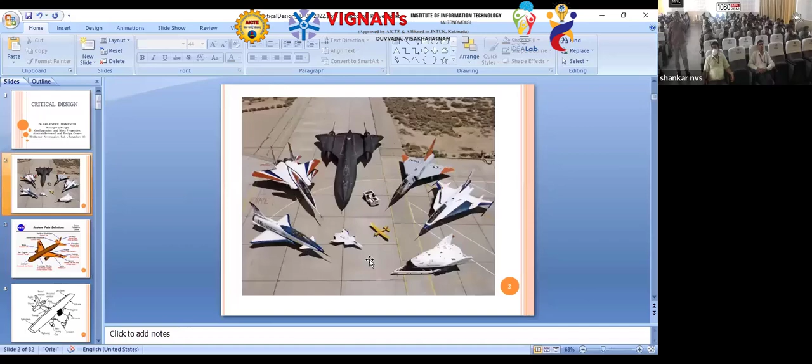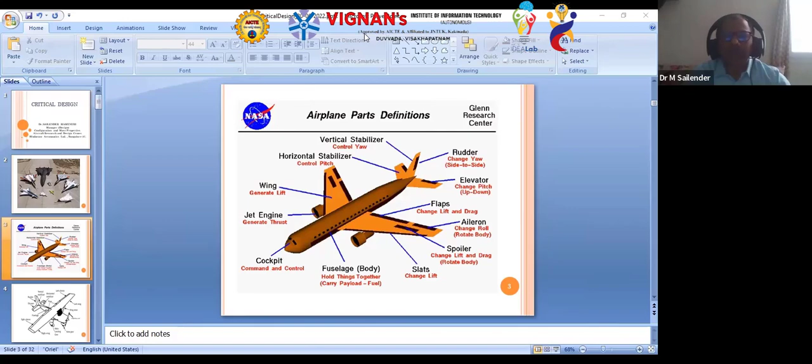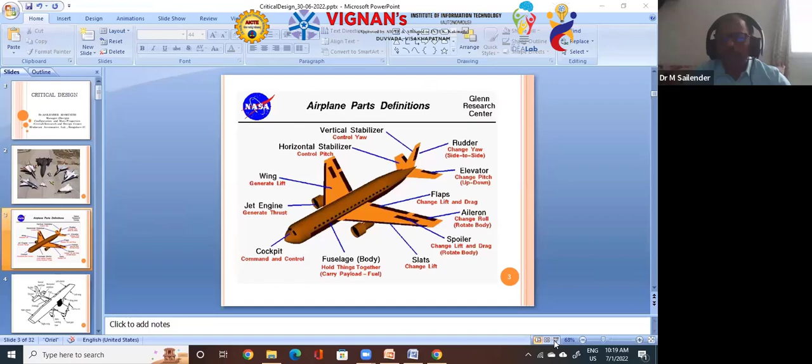Being a mechanical student... sir, we don't see your slides changing. You need to minimize the presentation or share the slideshow. Okay, now fine sir. Why don't you just start the show? It will be better. Okay, slideshow only, I kept it in slideshow, sir. Maybe you need to share that one. Is it fine now? No sir, this presentation only we can see. I think you go with the presentation only, sir. Why don't you share the entire screen, sir, so that it will be easy for you. Is it now visible, sir? No sir, I think you need to share your screen, entire screen. In Zoom, you have to share the screen, not share screen. Now see, sir, we still see the presentation only. I have not kept it in... I think you need to minimize this one first. Now see, sir. Yes, now it is okay. Right sir, now changing the slides. Yes sir, good, thank you.

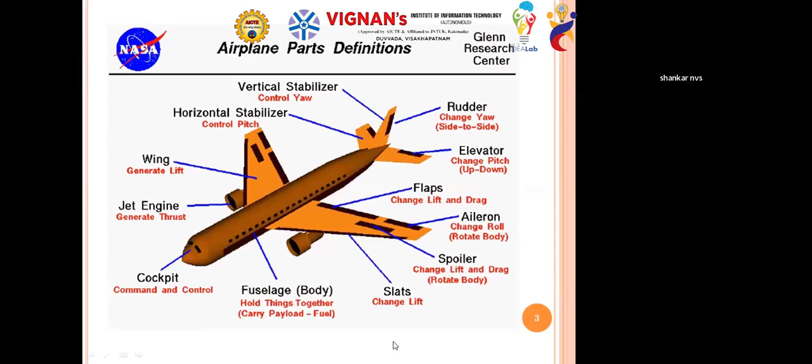Okay, being a mechanical guy, I just want to give an awareness about the aircraft, and make you aware of the terminology we use as we go further into it.

This is the main body of the aircraft, which we generally call the fuselage. Based on the length of the aircraft, we can divide it into front fuselage, center fuselage, and rear fuselage, or just front and rear fuselage.

Is the cursor showing, sir? Yes. And these are the main wings. This is the tail boom area, which we call the horizontal tail and vertical tail, or otherwise empennage — we call it wing and empennage.

And these are the jet engines, and below, in this picture, we cannot see the undercarriage, which is nothing but the landing gear. Whatever brown color we see, we call control surfaces. Control surfaces are nothing but flight control systems — pitch up, pitch down, yaw, all these things are controlled with the help of this.

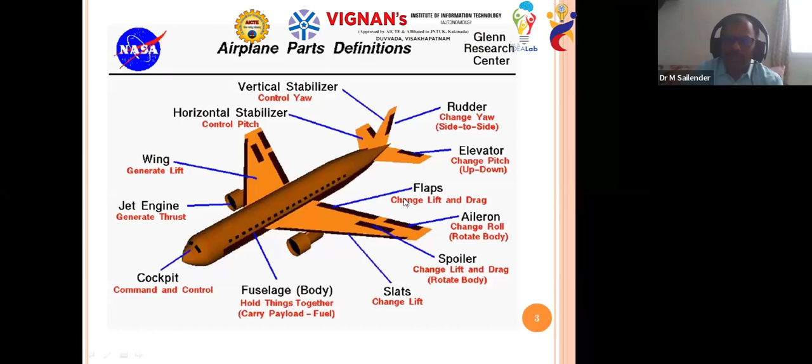Whenever there is a fan-based propeller, the engine will automatically be mounted just beside it. Whereas when we come to jets, that depends on the individual aircraft — it will vary one to one. This is what I wanted to tell you about the terminology of the aircraft.

As per my agenda, these are the things I'm going to cover in brief. The first one is evolution of aircraft, that is a feasibility study in design phase. Theoretically, the design phase involves synthesis, which means design, what they call concept building, and next synthesis, and next they call it testing and productionization.

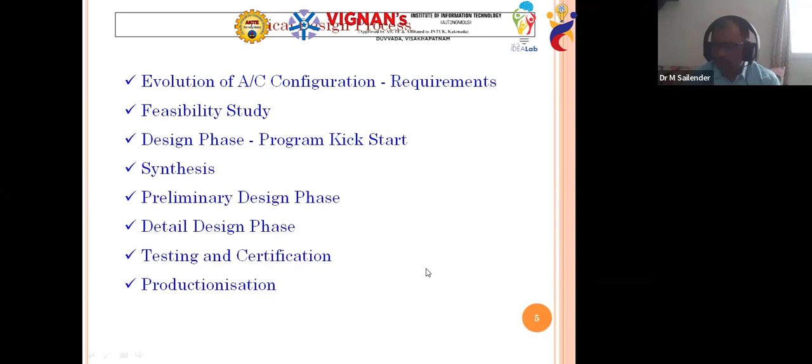But there are a lot of steps involved in concept building, which is the kick start of the program. After that, synthesis will happen. Synthesis is nothing but a detailed analysis, which I'll explain elaborately in further slides. Next is preliminary design phase and detailed design phase. Once it is made, it will go for ground and in-air testings for getting certifications. Then it will go for productionization, and the design will be frozen at that level.

Going to the next slide, that is nothing but evolution of an aircraft configuration. Whenever any program starts, people will not immediately start working on systems to shape the aircraft, right? First of all, you should know what you want to make, which is nothing but requirements.

When you have a customer, you don't need to bother about defining the problem, but you still need to understand the requirements. So what do you mean by requirements? Generally in our case, we have many situations where we have customers, but not all the time will we have customers. They need to start on their own also - that is the second situation. The first situation is when the program has a customer, obviously the requirements will be given by the customer.

When you do not have any kind of customer, what will be the requirements then? You need to start even building the requirements yourself. That is nothing but like new building, new product development - generally we call it new product development. So in this second case, you start thinking about and writing the requirements. You need to determine what kind of requirements you want.

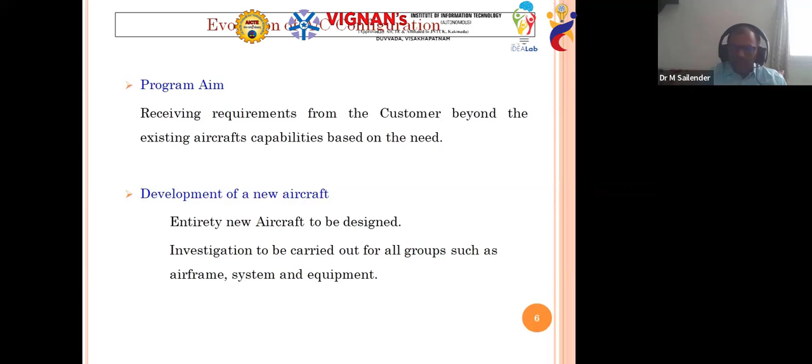At this stage you will be able to understand and get the requirements. The final output from this stage is nothing but the requirements you will come to know. Once you come to know the requirements, do we start doing the project, meaning the design or modeling of the aircraft? No, first we need to understand the requirements.

This stage we call the feasibility study. Feasibility study means that whatever requirements are there, first you need to understand whether they are really feasible - can we really make the aircraft to meet the customer requirements? You may ask why this is again required - we already have the requirements, why not just start it? This is a wrong kind of perception. How? A simple example - when we have a desktop example, we will take a desktop as an example.

Nowadays we are buying one branded HP or Dell or anything, simply we are booking online and getting it. Desktop, you will get a CPU.

But earlier days, how we used to do, we used to go to different shops and get the best configuration. What do you mean by best configuration? What is the motherboard? What is the processor? What is the HDD, SDR, DDR? What is the graphic card? Everything we used to get as the best one, in every aspect. Motherboard is the best one, which is the best company and which is the best model. What is the processor? Best model and best company.

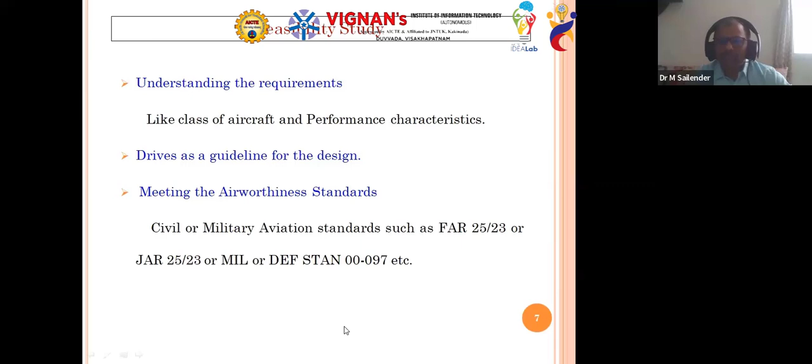This is the importance of the feasibility study of any particular requirement - making ourselves and the customers understand the requirements. That will be used as guidelines for the next project to go ahead. This is the first phase.

Once the feasibility study is done, we get into the actual design phase, called the preliminary design phase. From here onwards, the actual design phase starts - the actual work on the aircraft happens, which is a kickstart to the program. Whatever discussion we had earlier is now clear - we know what we want to do.

All those things are now in our top line, and then we start building the concept - that is conceptual design. These are the stages I just showed: design concept through synthesis, next is preliminary design and critical design phase, and the third is the detailed design phase where we do the modeling with the drawings.

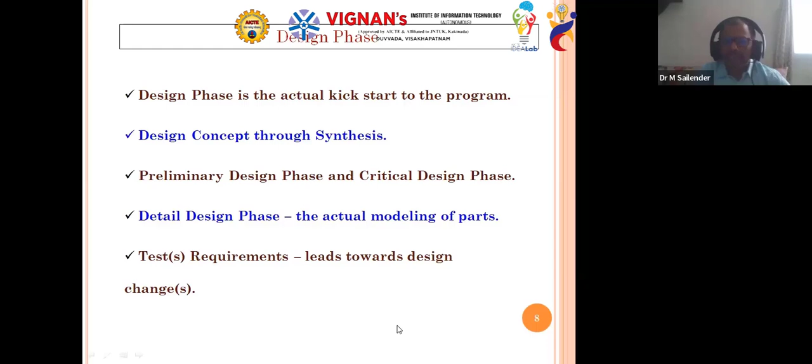Along with the drawings, and last but not least is the testing - all what we need to do for testing. That is request for testing, RFT. What we need to test and where to test it - on ground or in air - all these things will be defined, and it will be done by flight operations people. Once it is proven, the actual design will be frozen at that level.

The first step we are going to do is conceptual design. What exactly is conceptual design? Conceptual design is nothing but building an aircraft.

It is not a one-day job and not one person's job. As I said, there are structural people, system groups, system people, and not only that, a few supporting groups like me and others are also there. Together, it is teamwork - like how five fingers together mingle, then only we can hold and throw a punch. With one single finger, we cannot do anything. Similarly here, it is teamwork, team building. So the team only will build the aircraft - that is the main thing we need to understand about what conceptual design means.

Whatever the requirements we have now, all things will rotate in our mind, and we will have our own thought process. That thought process will come into a virtual realistic form - that is nothing but we'll start building the system, shaping it out. Simply put, this is the sizing and shaping of the aircraft - what could be the outer shape and size of it.

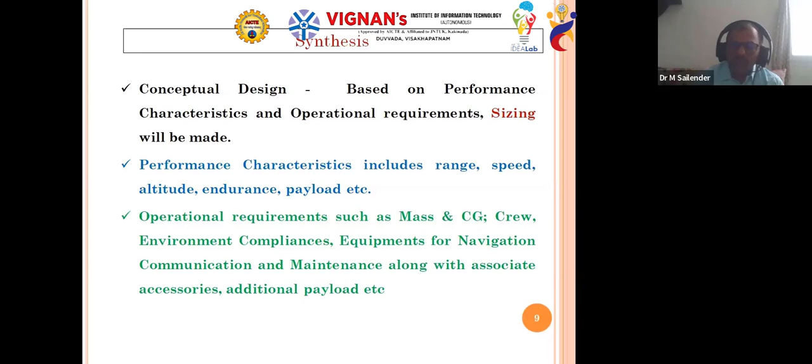Based on the type of aircraft - if it's a trainer aircraft, 2 cockpits are supposed to be there, and if it's a fighter aircraft, 1 cockpit. And what type of seating - side by side, or one behind the other, that is tandem seating. Side by side seating means sometimes the cockpit layout will have duplicate monitors, consoles, switches, or if it's one behind the other, obviously you should have duplicate cockpits.

2 cockpits you need to build, and what kind of seating arrangement - it may be bucket seating or ejection seating. When it's ejection seating, it will have different kinds of standards. So for one simple cockpit, where is the location of the cockpit? Is it in the front fuselage? If it's a trainer aircraft, front fuselage and center fuselage also will share it.

That needs to be addressed, and what type of canopy, because in that cockpit there will be different types of pilots. Today even women are pilots, sitting in the cockpit flying the aircraft. So you need to address - there is no change in the seat, you will have only one single seat.

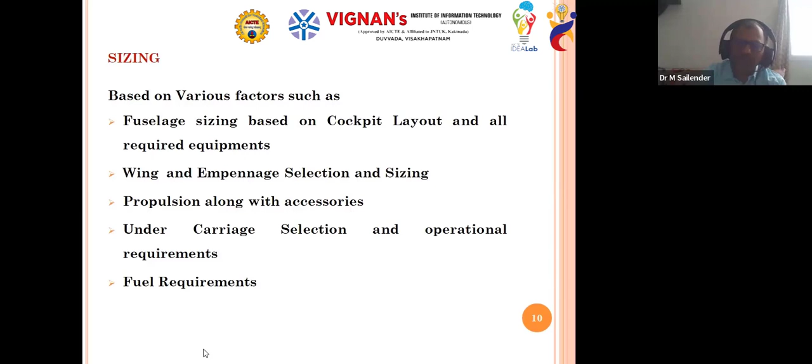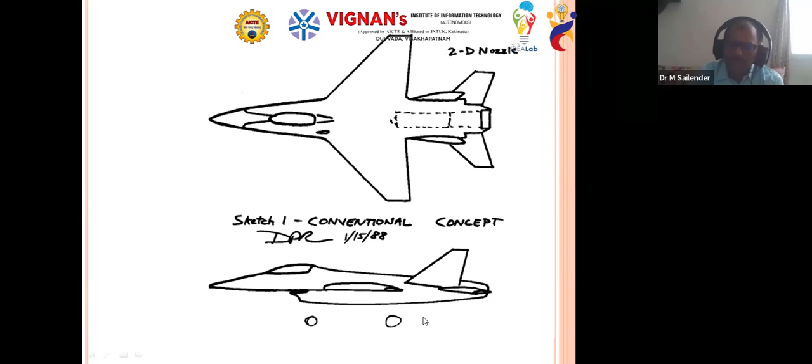For example, in very olden days, we used to draw like this, conventional concept. Whatever I said now, these are all iterative process. This is the wing area, and this is the HT, horizontal tail. Based on more surface area, you get more lift possibility. These are the landing gear, and how it is going to work, what is the ground clearance - everything needs to be addressed at the time of concept itself.

So those will be tested in the wind tunnel, and once it is frozen, the outer shape of the aircraft will be shared to all the design groups.

So that part, whatever I have told till now, the conceptual design is one of the crucial areas which will be taken care of by our own department. I am also one among that team, and I have also been involved in one of the projects.

Now, once after freezing the size and shape of the aircraft, next we will move to the preliminary design phase. Till now we have only spoken about the shape of the aircraft, and we know what main units are coming into it. That's all we know till now.

Now everyone will start thinking, and whatever thinking process is there will be virtualized and placed into the aircraft. That is nothing but layout, which we will make. Everyone will start doing their own layouts - individual design groups will come out with their own layout.

For example, if you are talking about FCS, flight control systems, what type of control surfaces are there? Is it an aileron, flaperon, or otherwise flap, leading edge flap, or rudder?

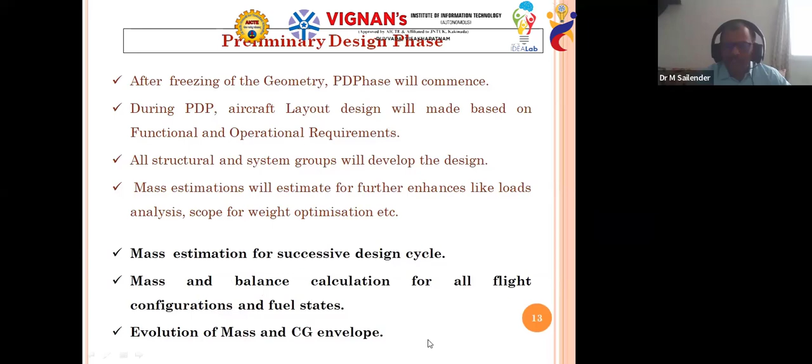I'm just skipping about mass estimation, successive design, mass balance calculation, and evolution of mass and CG envelope for this moment, and later I will come to these points.

The next point is, in the same phase itself, in the preliminary PDP stage, we also undertake one more stage called critical design phase. Whatever layout we have made, here we still have a scope of chance to change in the sizing of the aircraft, because whatever we assumed, whatever we imagined, everything will not go in the same manner. It may not be only in the aircraft industry, even in our personal life or any industry, what we imagine will not happen in the same fashion. So obviously there will be some changes.

Those changes need to be captured at the time of design, because the aircraft is not going to fly for only 5 or 10 years. You need to think about at least 30 to 40 years. It has to have a lifetime of 30 to 40 years.

For the building itself, it takes 5 to 10 years of time. And when you are taking 5 to 10 years, you should have scope for future developments also. Keeping all those things in mind, you need to review each and every aspect of individual structural as well as system level analysis, and need to be finalized at this stage. This is the second and last chance to do any kind of scaling up or scaling down of size and weight related things, anything you can do at this level. That is called the critical design phase.

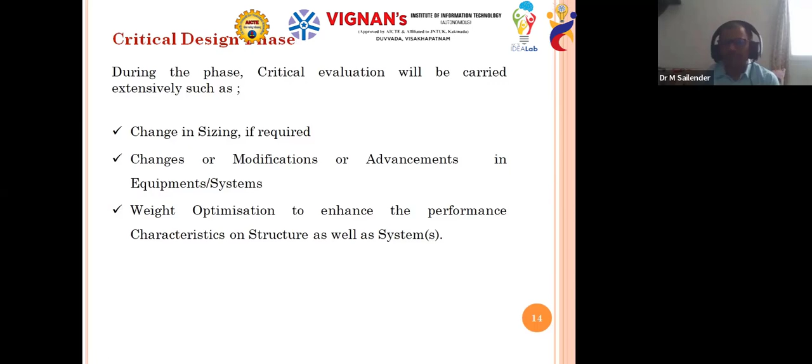There will be exhaustive discussions among the groups, whether structural or otherwise, whom they are addressing, whom they are serving. All together will sit and discuss how to serve and what the best way is to do it. In that way, exhaustive analysis will happen and will be frozen at the end of this phase. Not only the structural people, but system level people also will have the freezing of their design. That is nothing but design architecture.

Once after this critical design phase, we move to the actual design phase, that is the detailed design phase. Once we come into this phase, we start developing all the parts in modeling software. That is part modeling, and it goes to the system level and aircraft level assembly levels. Not only the part assemblies, but even the drawings also, because we are not 100% moved into Industry 4.0.

Industry 4.0 talks about digitization. There is a concept called MBD, model based design, meaning there won't be any drawings, but still we are in the drawing stage only. You need to make drawings also, so that it will be a guideline for fabrication of the parts. These drawings need to be made at this level. Parts will be frozen - what type of part, where it is coming, how it is going to be - all such things along with the drawings will be made for further manufacturing purpose.

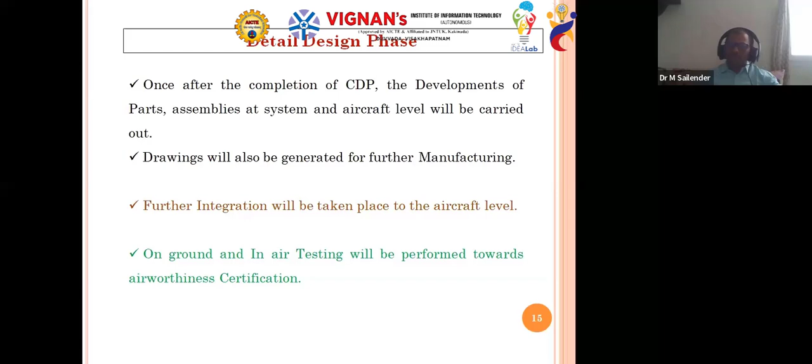Once after fabrication and undergoing different manufacturing processes, the parts will be manufactured and go to the assembly hangars, where integration of all these parts into sub-assemblies, assemblies, system assemblies and aircraft assemblies happens. Those things will be integrated to make the aircraft roll out as a product. Once it is rolled out from the assembly integration hangars, it goes for various ground testings and in-air testings, so that it can move towards getting the certification of the aircraft. Once it achieves airworthiness certification, it goes into production, meaning whatever design was made will be productionized.